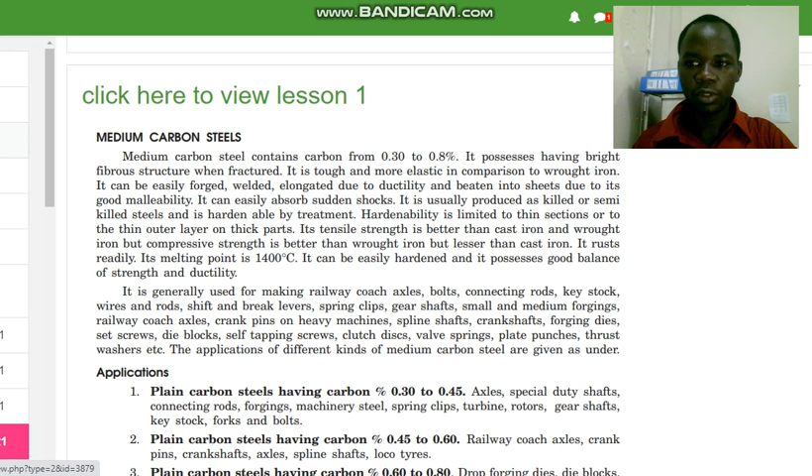Medium carbon steels contain a carbon percentage of about 0.3 to 0.8%. It possesses a bright fibrous structure when fractured. It is a tough material and more elastic in comparison to wrought iron. It can be easily forged, welded, elongated due to ductility, and beaten into sheets due to its good malleability.

It can easily absorb sudden shocks. It is usually produced as killed or semi-killed steels and is hardened through a treatment process.

Hardenability is limited to thin sections or to the thin outer layer on thick parts. Its tensile strength is better than cast iron and wrought iron, but compressive strength is better than that of wrought iron, though lesser than that of cast iron.

This is a very important material because it rusts readily, and the melting point is usually around 1400 degrees centigrade, and it can be used in regions where the required melting point is below this 1400. It can be easily hardened, and it possesses a good balance of strength and ductility.

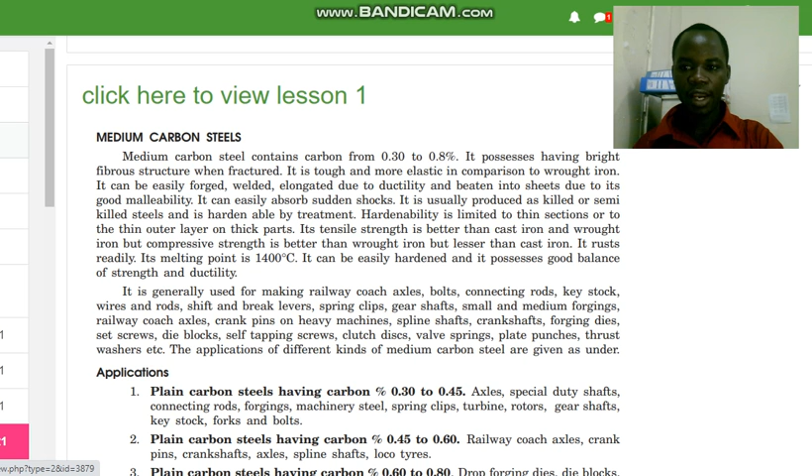Other than the applications, we have the ratios of these carbon steels, and the percentage ratio of carbon inside the carbon steel will dictate where it should be used. For the plain carbon steel

having a carbon content of 0.3 to 0.45%, it has been widely used to make products such as axles, special duty shafts, connecting rods, forgings, machinery steels, spring clips, turbine rotors, gear shafts, key stock, forks, and bolts.

However, the plain carbon steels having carbon percentage of 0.45 to 0.6% has been widely used to make railway coach axles, crank pins, crankshafts, axles, spline shafts, and loco tires.

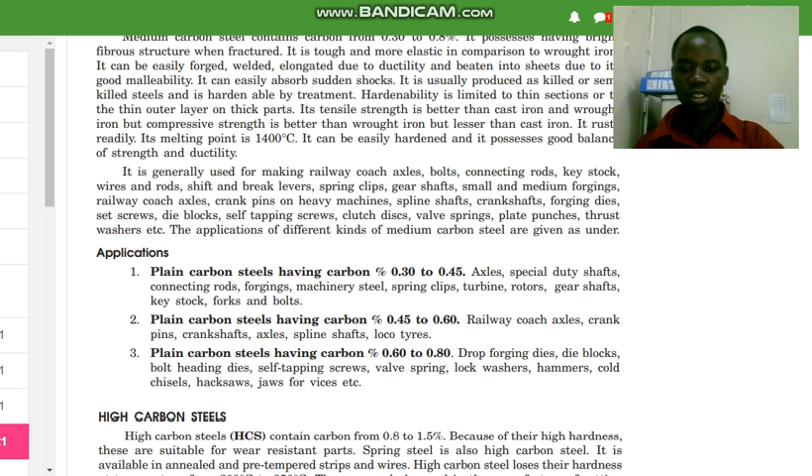As well, the plain carbon steel having carbon percentage of 0.6 to 0.8 has been used in making drop forging dies, die blocks, bolt heading dies, self-tapping screws, valve springs, lock washers, hammers, cold chisels, hacksaws, jaws of vices, etc.

Another type of steel is called high carbon steel, and as per the composition, high carbon steel contains 0.8 to 1.5% of carbon. This material finds application because it possesses properties like high hardness and good wear resistance, and spring steel is also high carbon steel.

The temperature at which this carbon steel loses its hardness is between 200 to 250 degrees Celsius. However, during the manufacturing process, it can only be operated at low cutting speeds. So these steels are easy to forge and simple to harden,

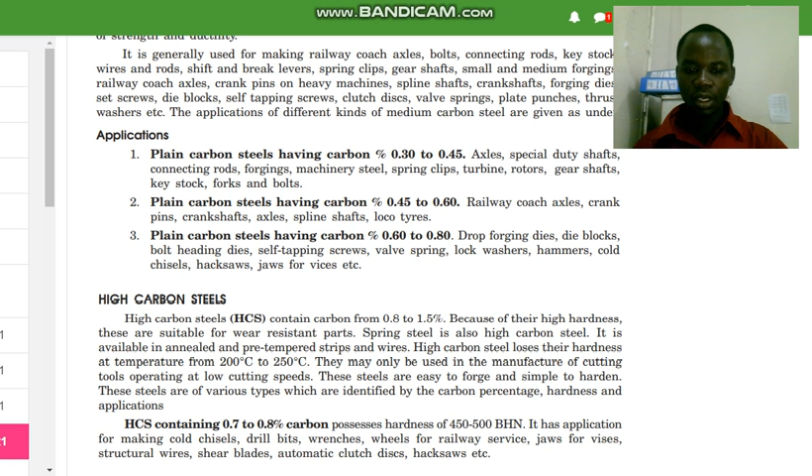and the percentage of carbon states high carbon steels. For high carbon steels containing carbon percentage of 0.7 to 0.8% and possessing Brinell hardness of 450 to 500, these are widely used in making cold chisels, drill bits, wrenches, wheels for railway service, jaws for vises, structural wires, shear blades, automatic clutch discs, hacksaws, etc.

The steel containing 0.8 to 0.9% of carbon and having Brinell hardness of 500 to 600 has been adopted in making products such as rock drills, punches, dies, railway rails clutch discs, circular saws, leaf springs, machine chisels, music wires, etc.

Steel containing carbon percentage of 0.9 to 1% has been used in making dies, spring keys, and shear blades. Those containing 1 to 1.1% of carbon are used in making railway springs, mandrels, taps, balls, pins, tools, thread metal dies. Those containing 1.1 to 1.2% carbon are used in making taps, twist drills, thread dies, knives, etc.

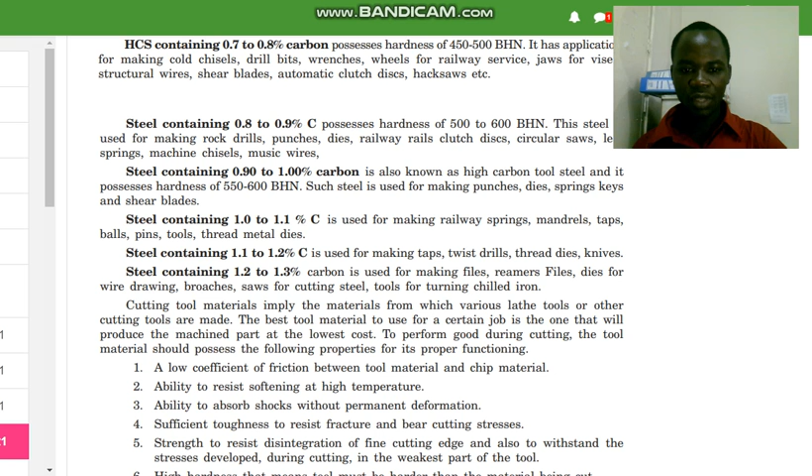That containing 1.2 to 1.3% of carbon is used in making files, reamer files, dies for wire drawing, broaches, and saws for cutting steel.

To perform well during cutting, the tool material should possess the following properties for its proper functioning: it must possess a low coefficient of friction between tool material and chip material, must have the ability to resist softening at high temperature, ability to absorb shocks without permanent deformation, and sufficient toughness to resist fracture and bear cutting stresses.

It must have strength to resist disintegration of the fine cutting edge and also to withstand the stresses developed during cutting in the weakest part of the tool, and high hardness, meaning the tool must be harder than the material being cut.